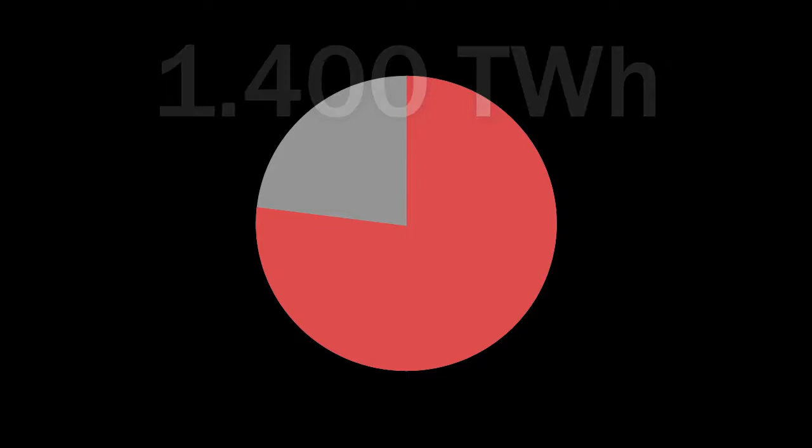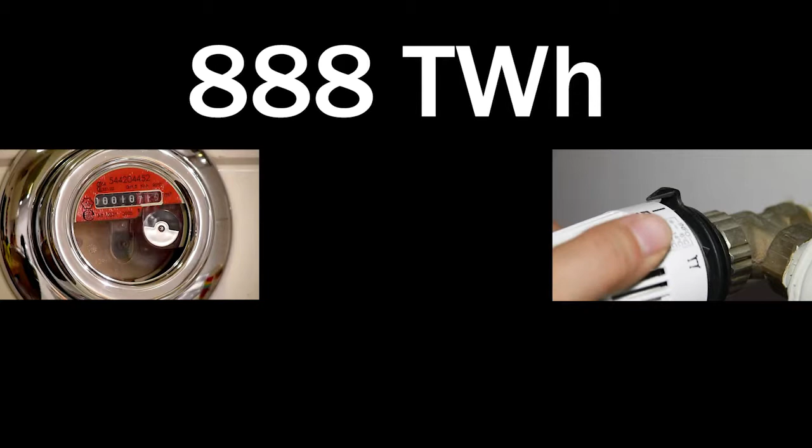Here it should be noted that the proportion of heat production in Germany is 1,400 terawatt-hours. This is far higher than the proportion used for electricity generation, 620 terawatt-hours. Around 888 terawatt-hours are required just for room heating and hot water requirements. In the foreseeable future, the established renewable energies alone will not be able to cover this demand.

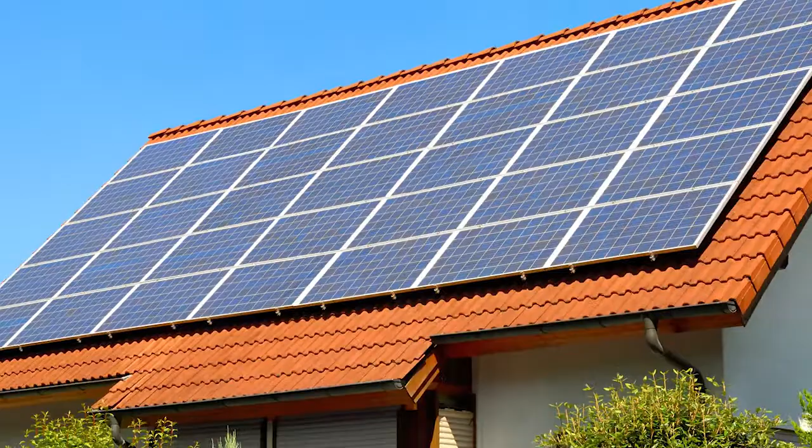For wind power, photovoltaics and geothermal energy, there are not enough locations, consistency in energy supply, or possibilities for storing energy. In many places, new installations attract public opposition. Without supplementary technologies, the energy transition is a task which can scarcely be fulfilled. But there is no time to lose. Potentials are available.

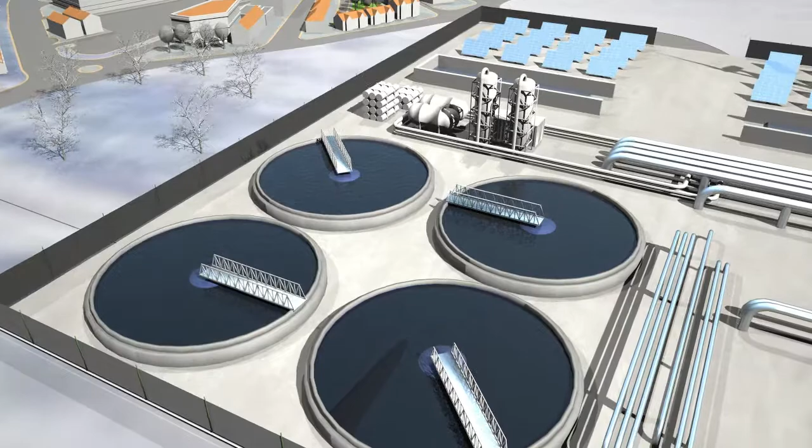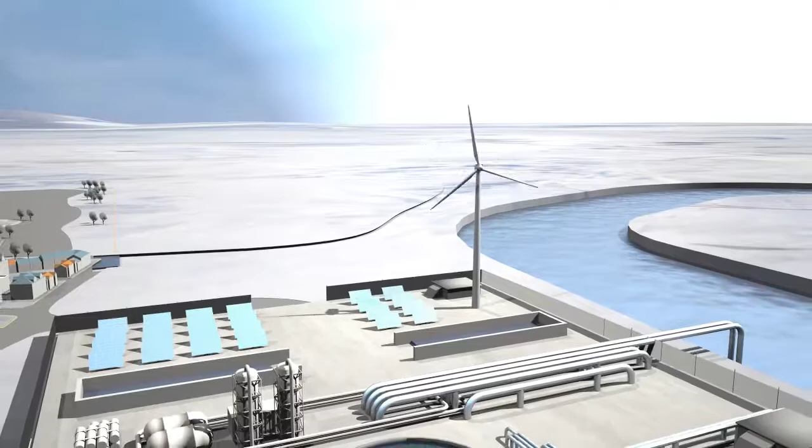Not only policymakers are called upon to tackle the energy problems. Industry must make a major contribution. Above all, key energy-intensive sectors have a responsibility, and one of these is the water industry. After all, water supplies and wastewater disposal require energy, a lot of energy. Often, the wastewater treatment plant is a local authority's biggest consumer of energy. But there is also plenty of energy in wastewater.

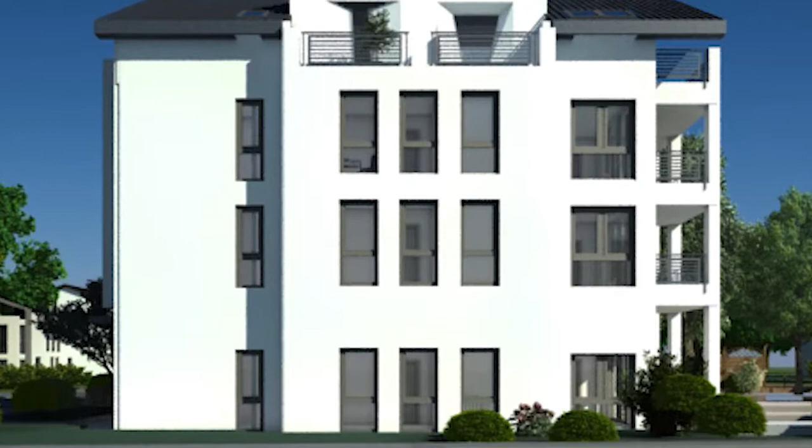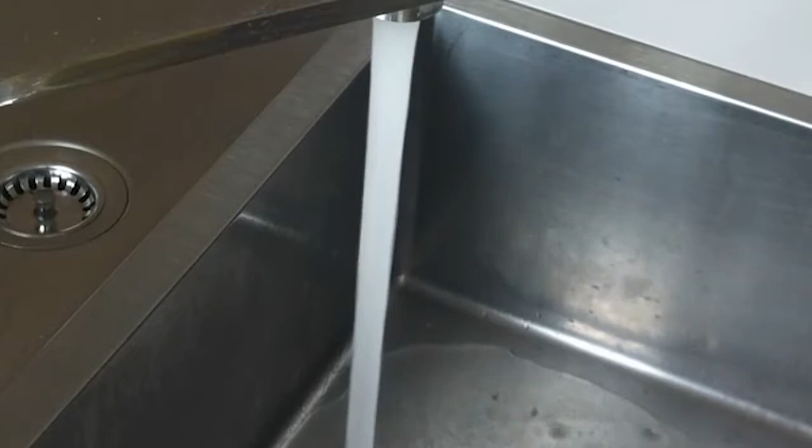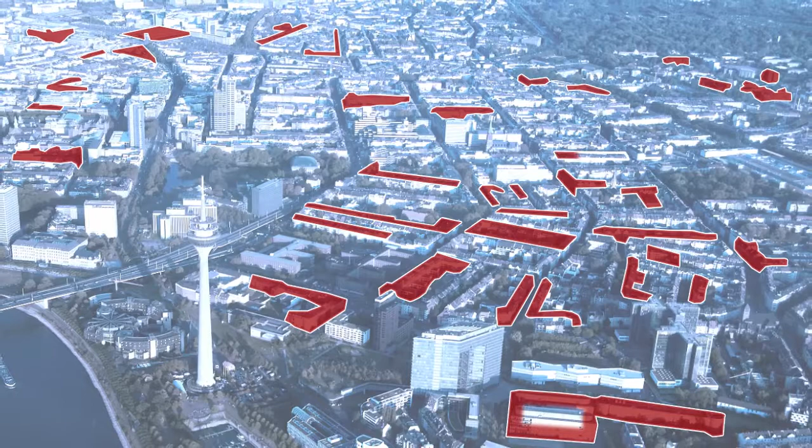Every day, vast amounts of energy that have already been paid for are flushed down the drain. Through showering, cooking, washing clothes or dishes, millions of cubic meters of hot water are discharged into sewers without tapping their potential. Its energetic potential: around 80 terawatt-hours. According to the latest study by the University of Stuttgart, this is equivalent to about 9% of the annual energy requirement for room heating and hot water in Germany. According to the study, every 10th building could hence theoretically be provided with heat from wastewater.

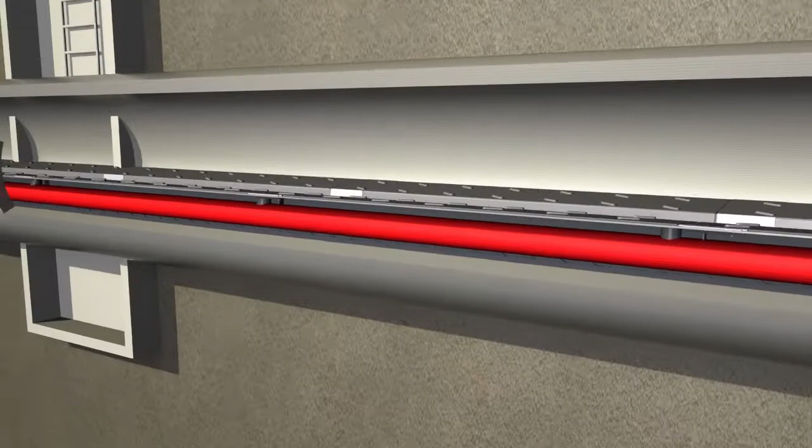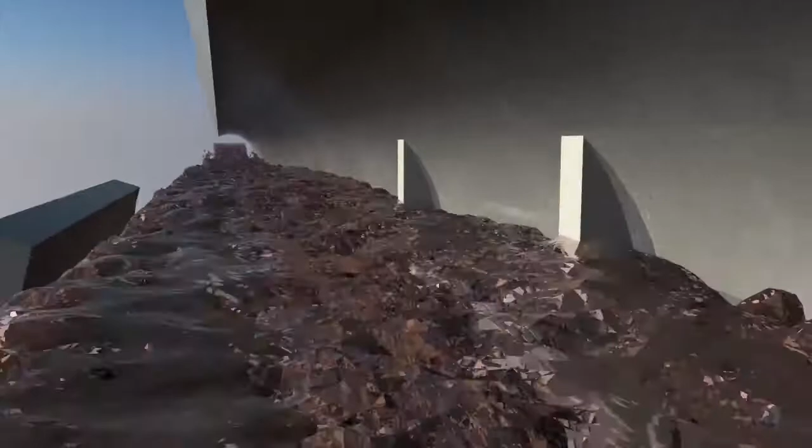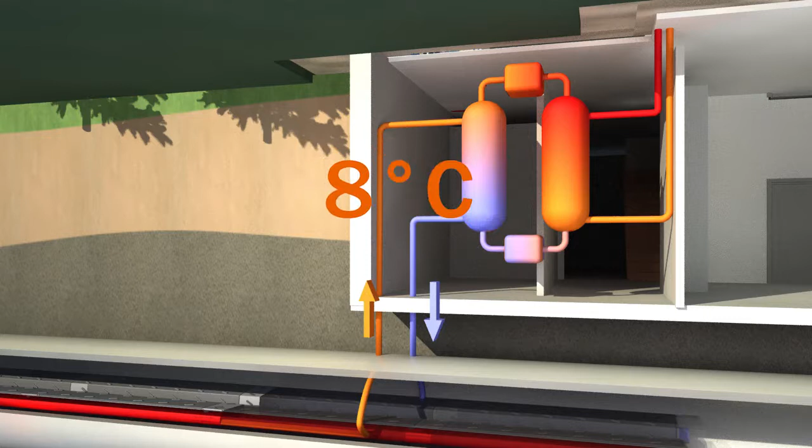Making this heat energy available for use is very simple. The principle has been known for over 30 years. Appropriate technologies have been used for a long time. The flow of warm wastewater, which is between 10 and 20 degrees Celsius all year round, is discharged into the sewer network via heat exchangers, which transfer this energy to an intermediate cycle. A heat pump pumps the heat to the required energy level and provides it to the final customer.

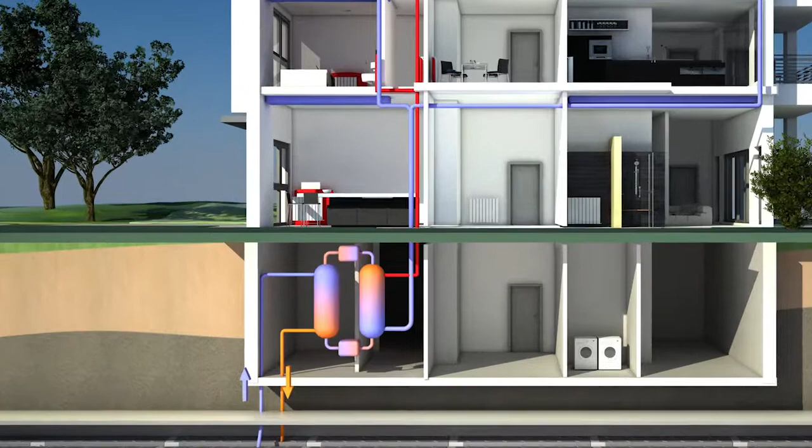However, heat pumps are not only suitable for heating. During the summer months, they can use the relatively cold wastewater flow for air conditioning in buildings. Their efficiency is greatly improved through combining heating and cooling. The enormous potential for using wastewater heat would be increased several times if industrial waste heat could also be used.

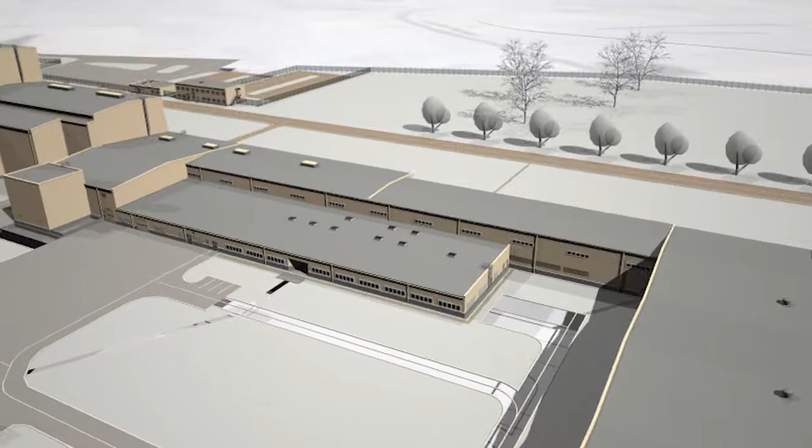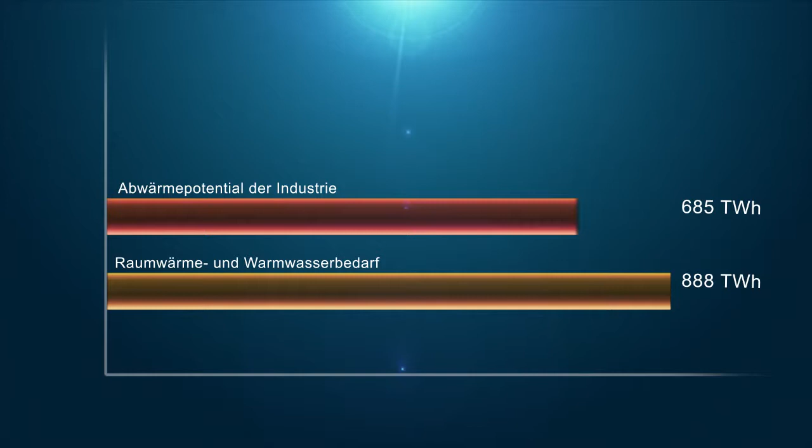Smoking cooling towers are a familiar scene, because virtually every industrial process generates waste heat. Up to now, its energy at temperatures ranging from 20 to 55 degrees Celsius is discharged into the atmosphere without being utilized, discharged into waters in return for high charges, or cooled in cost-intensive processes. The waste heat potential of industry and power plants in Germany is approximately 685 terawatt-hours, more than 3/4 of total heating requirements. This vast energy reserve can be made available through the local heating sewer network.

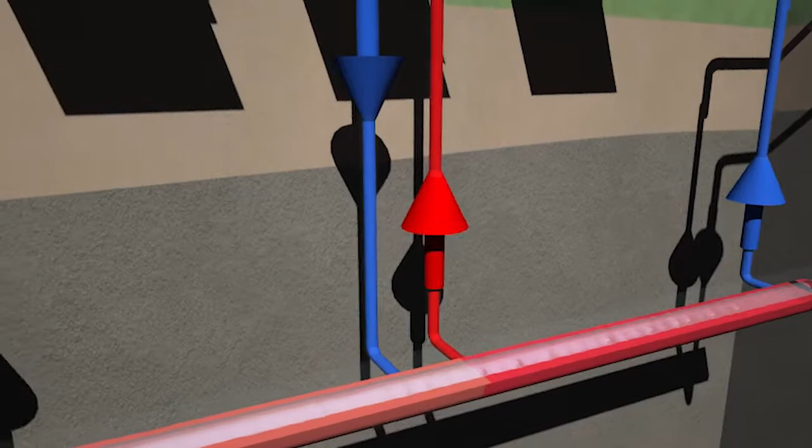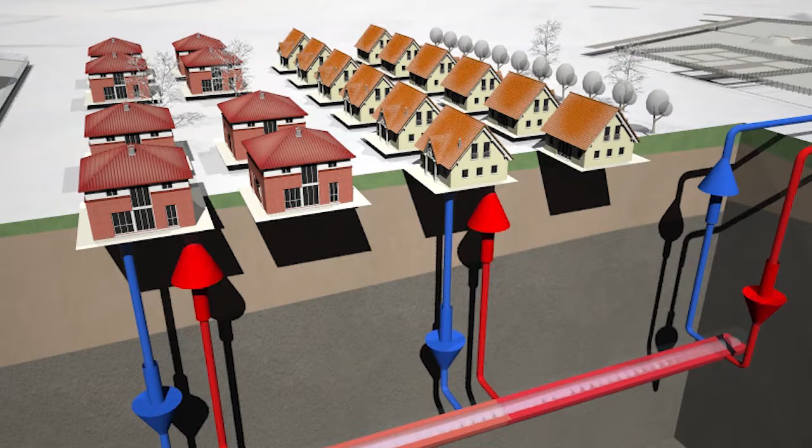Instead of discharging excess energy into the environment and senselessly wasting it, waste heat can be discharged via heat exchangers into the existing sewer network. While the temperature of the industrial cooling media is reduced to the required level without additional use of energy, it increases by several degrees in the sewer network and can be transported with the flow of wastewater. Downstream, where a suitable heat consumer is located, the energy is drawn out of the wastewater by an additional heat exchanger.

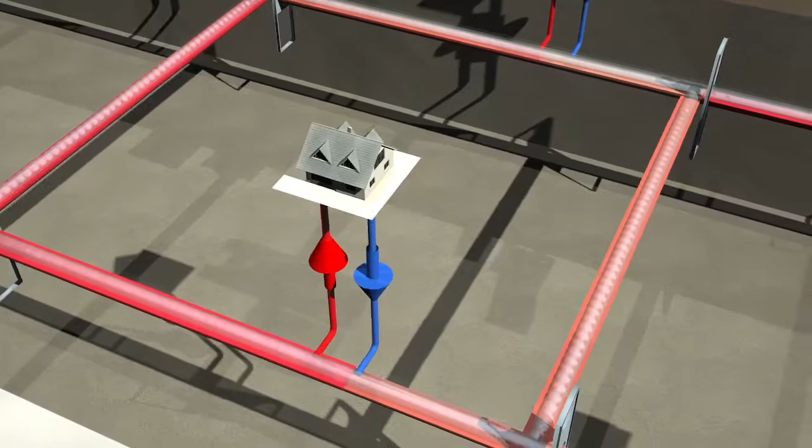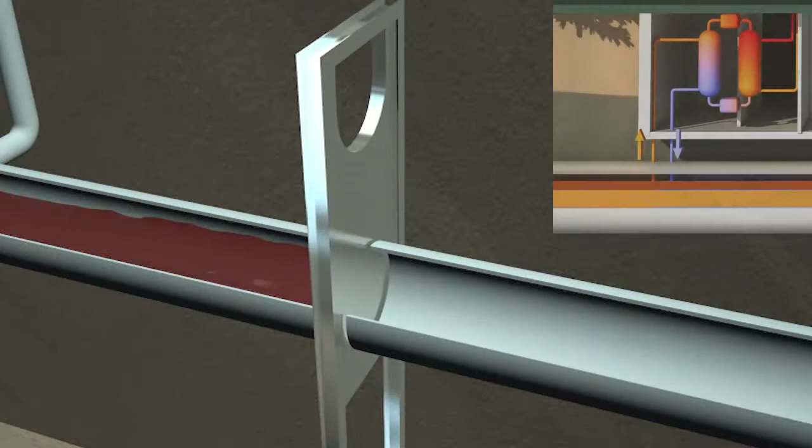Modern sewer network management systems enable the above-mentioned energy flow to be controlled according to requirements. Sewer network management is no longer a vision of the future. Today, this technology is already used in several cities. Such systems can also be used for controlling heat. Using weirs which regulate the sewer cross-sections, fluctuations in flow are compensated and flows of wastewater are directed according to settlement water management criteria or heat criteria. In this way, energy can be directed to the user or even stored.

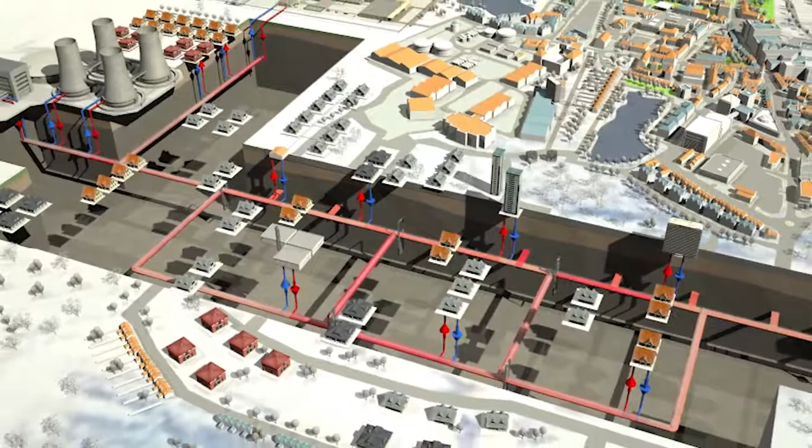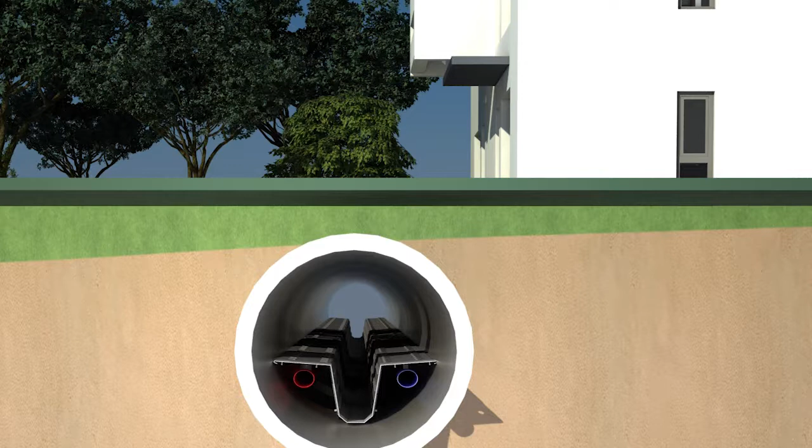Discharging heat into the sewer network even during summer, when the absolute wastewater temperatures are naturally higher, does not have any negative impacts on processes in the wastewater treatment plant, because of the heat storage capacity of the ground. If the temperature level increases in the sewer network, some of the heat is discharged into the surrounding ground. If the wastewater temperature falls, the ground radiates the energy back into the sewer network. Hence, discharges are compensated for along the course of the flow of wastewater. If recooling of the wastewater is necessary before it enters the sewage plant, groundwater wells combined with heat exchangers provide a simple technical solution.

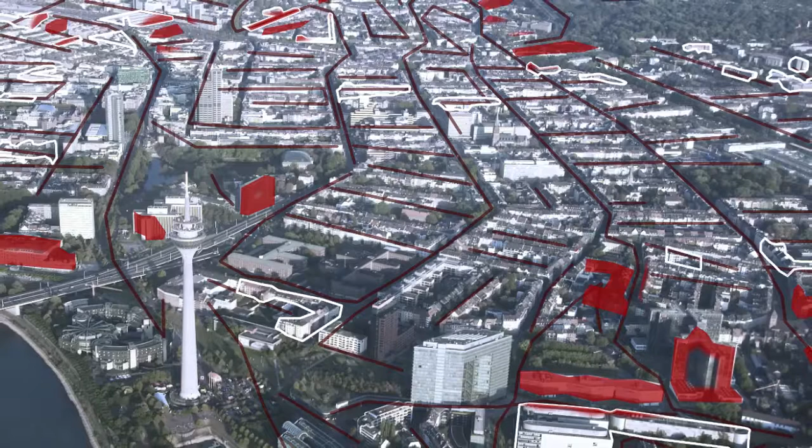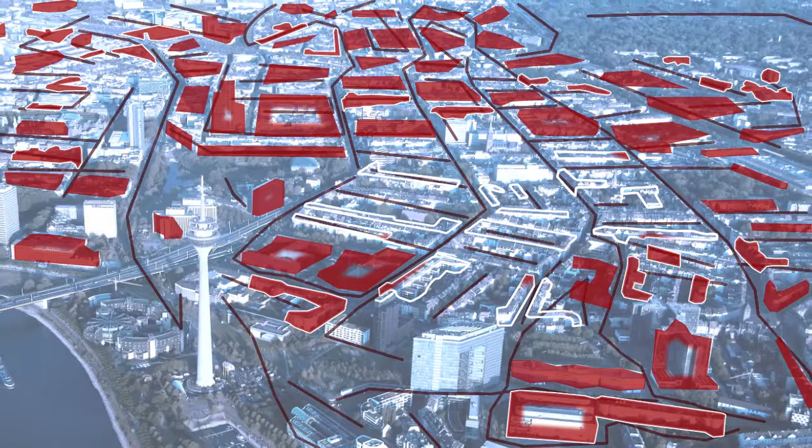Using such a local heating sewer network, which intelligently controls flows of wastewater including the use of industrial waste heat, many municipal households could be provided with energy all year round for room heating and hot water. The efficiency of this innovative form of energy is above all influenced by the wastewater temperature. If the temperature level increases in the sewer network due to discharges of industrial waste heat, the heat production costs are reduced compared to fossil energy carriers. If expected increases in energy prices are taken into account, this effect is even greater. The heat pumps require little primary energy, and their efficiency is increasing.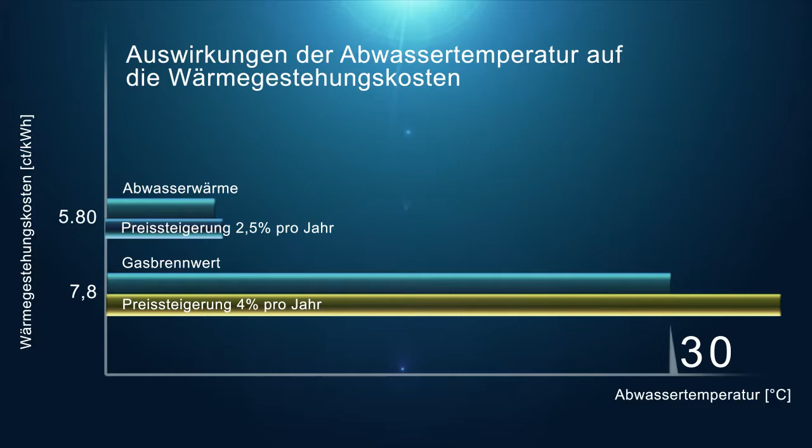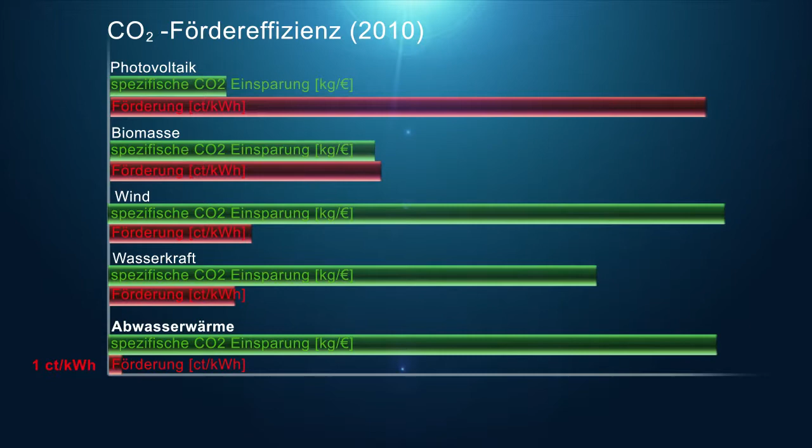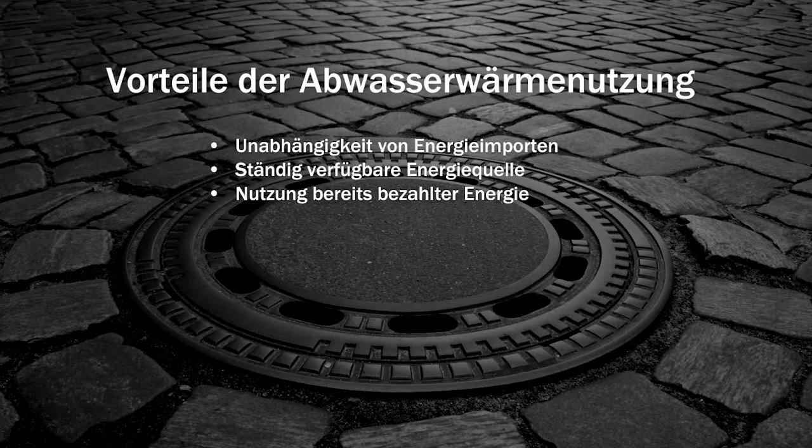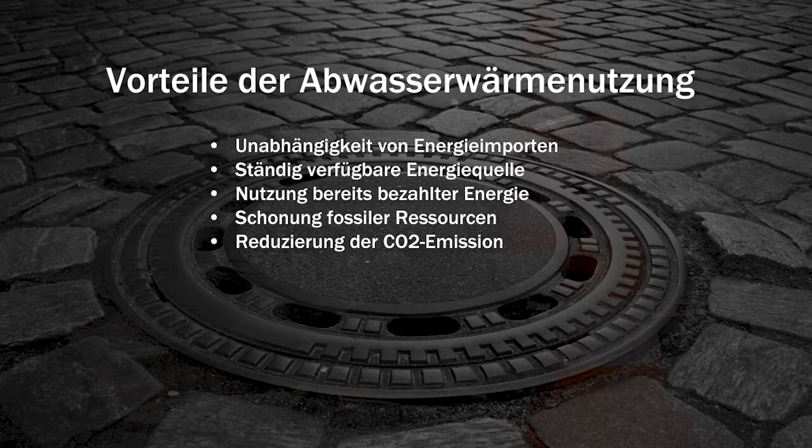Utilization of wastewater heat is a non-subsidized technology. If energy from wastewater was subsidized at the rate of 1 cent per kilowatt hour, the CO2 recovery efficiency would be 7 times higher than for photovoltaics, around 30% higher than for hydropower, and the same as for wind energy. Hence, the advantages are obvious. Instead of expensive imported energy, Germany will use an energy carrier which is constantly available and has already been paid for. The environmentally friendly technology preserves fossil resources and can make a substantial contribution towards saving on climate-damaging greenhouse gases.

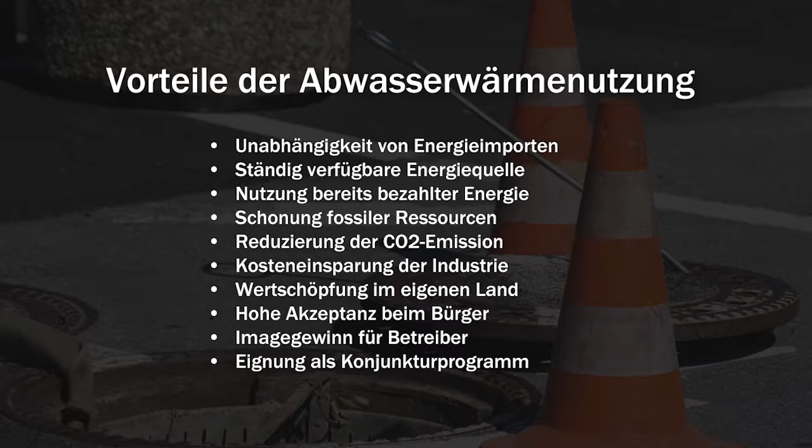Investments in wastewater heat utilization help industry to save costs and to keep added value in our own country. Since such plants are completely invisible, they are widely accepted by the public and are associated with an improved image for initiators and operators. Altogether, the utilization of wastewater heat in local sewer networks is therefore excellently suitable for economic stimulus programs. Today, the fairly recent technology of wastewater heat utilization has already been implemented in numerous projects.